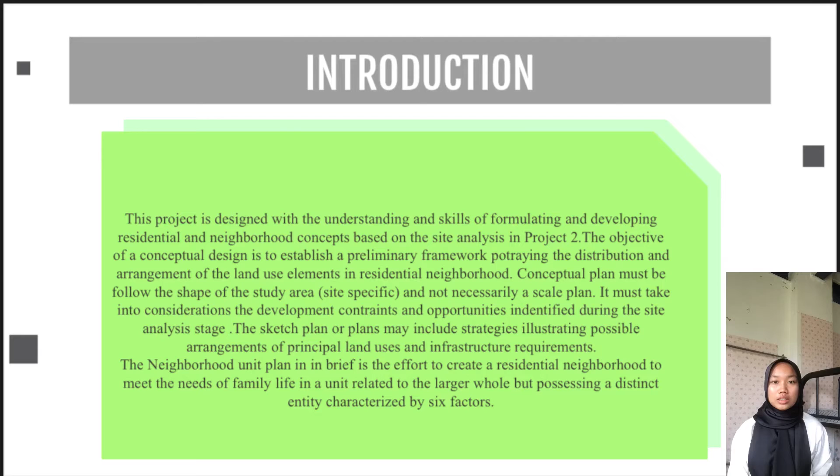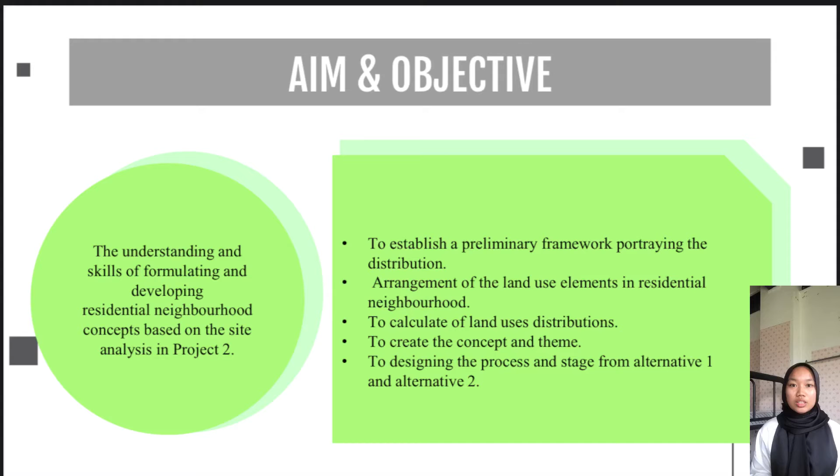The aim is understanding and skills of formulating and developing residential neighborhood concept based on the site analysis in Project 2. The objective is to establish a preliminary framework portraying the distribution and arrangement of the land use element in residential neighborhood, to calculate land use distribution, to create the concept and theme, and to design the process and stages from alternative 1 and calculation of land use distribution concept of neighborhood.

The neighborhood concept needs to be strengthened and emphasized in all types of landed and multi-story housing development to encourage interaction and social relation between residents.

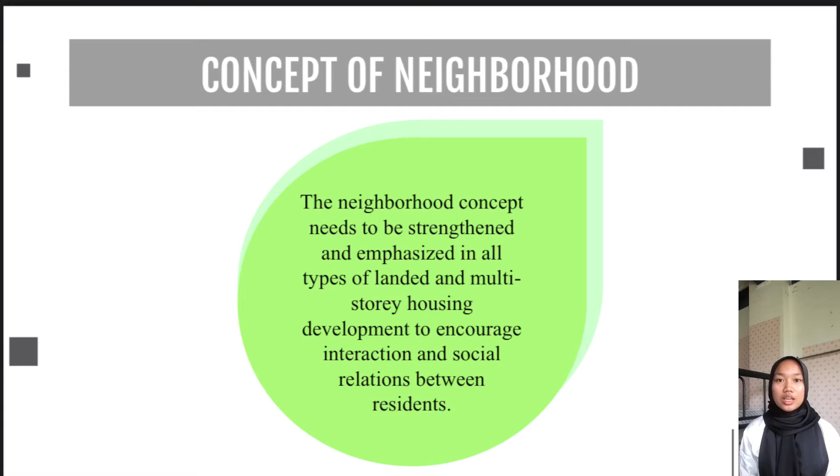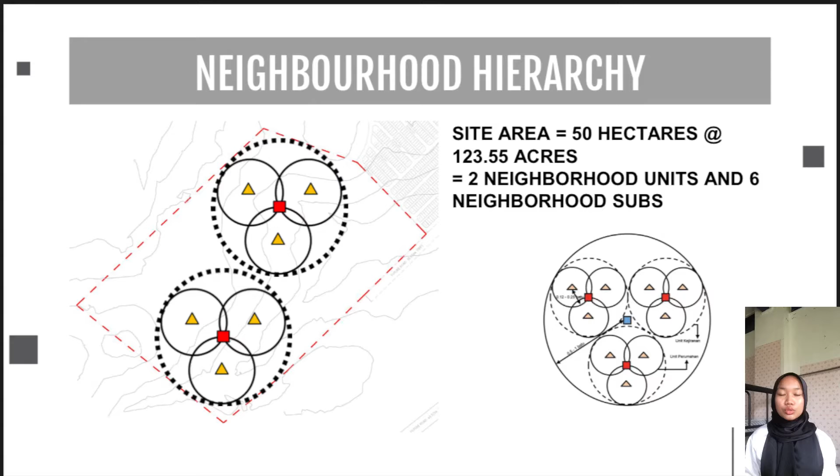Next, the neighborhood hierarchy. Site area is 50 hectares or 123.55 acres, equal to 2 neighborhood units and 6 neighborhood subs.

Percent of type of land use is 100%, and area requirement and percent of site for each land use according to the density set by standard area and hectare.

For the calculation of the total type of house is 30 acres, density units per acre is 936 units, and the last population is 4,815. This information is from Rancangan Tempatan Daerah Perak Tengah Jilid 2 tahun 2030.

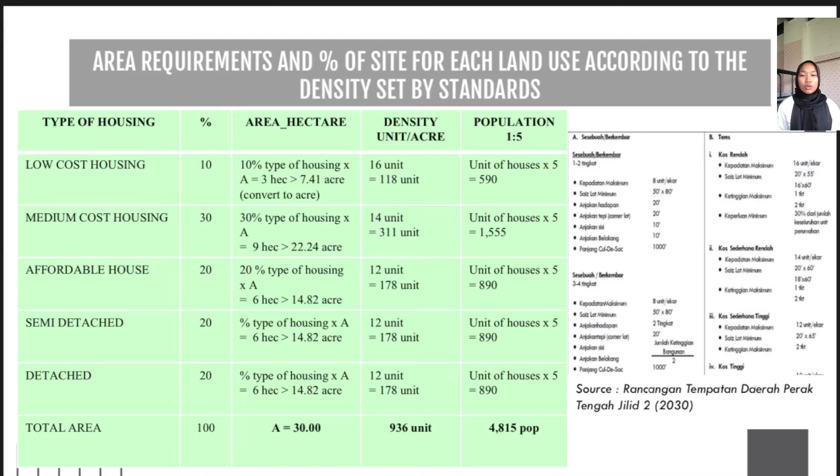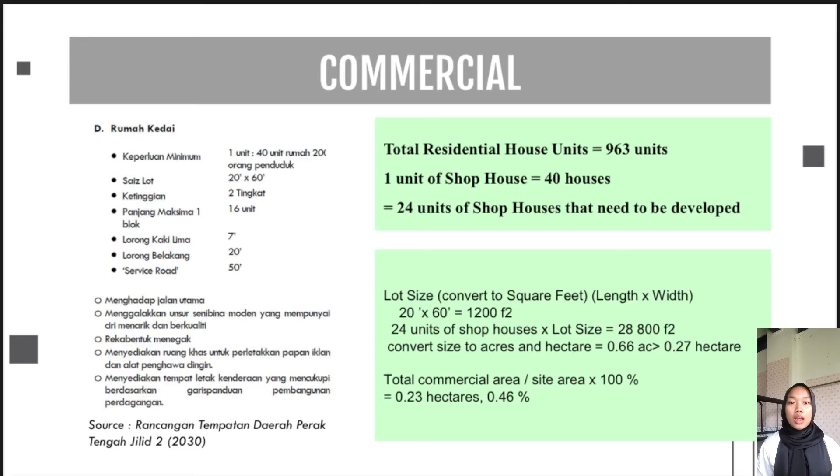Next, commercial. Total residential house unit is 963 units. 1 unit of shop house per 40 houses equals 24 units of shop houses that need to be developed. This information is from Perak Tengah District Local Plan Volume 2, 2030.

Public facilities: the community facilities are surau, public hall and kindergarten. Total area of facilities or site area is 0.74 hectare. This information is from Rancangan Tempatan Daerah Perak Tengah Jilid 2 tahun 2030, and Garis Panduan Perancangan Kemudahan Masyarakat JPBD Semenanjung Malaysia. Next, infrastructure and utilities.

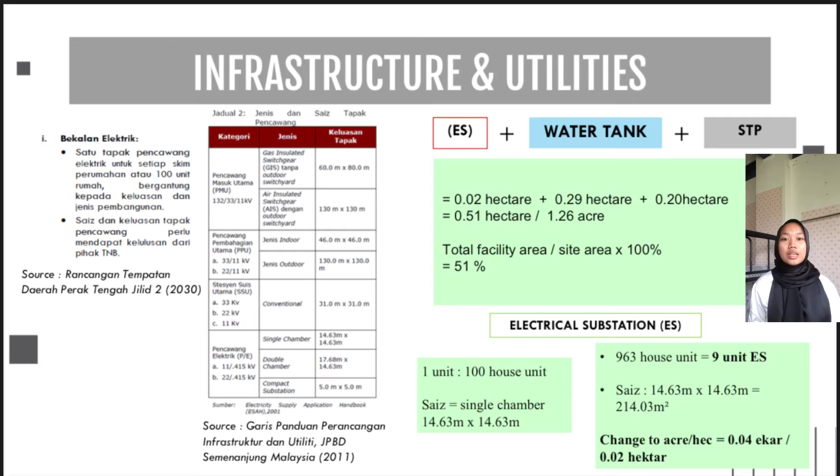Water tank: water tank has 0.49 acre and 0.20 hectare. This information is from Garis Panduan Perancangan Infrastruktur dan Utiliti JPBD Semenanjung Malaysia tahun 2011.

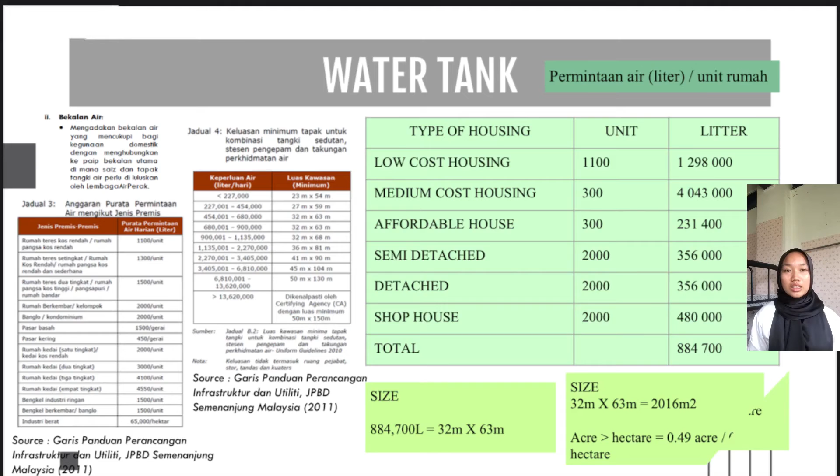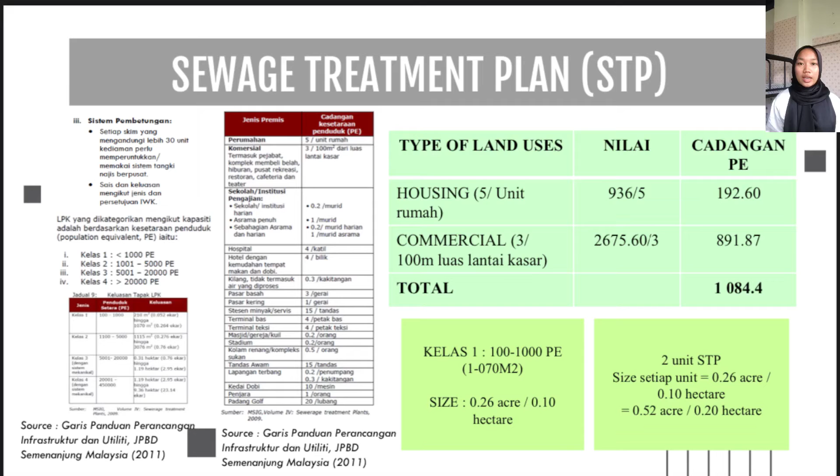Next, sewage treatment plant has 0.52 acre and 0.20 hectare. This information is from Garis Panduan Perancangan Infrastruktur dan Utiliti JPBD Semenanjung Malaysia.

And lastly, for open space, field and playground, area of 5 hectares and 10%. This information is from Local Plan of Central Perak District Volume 2.

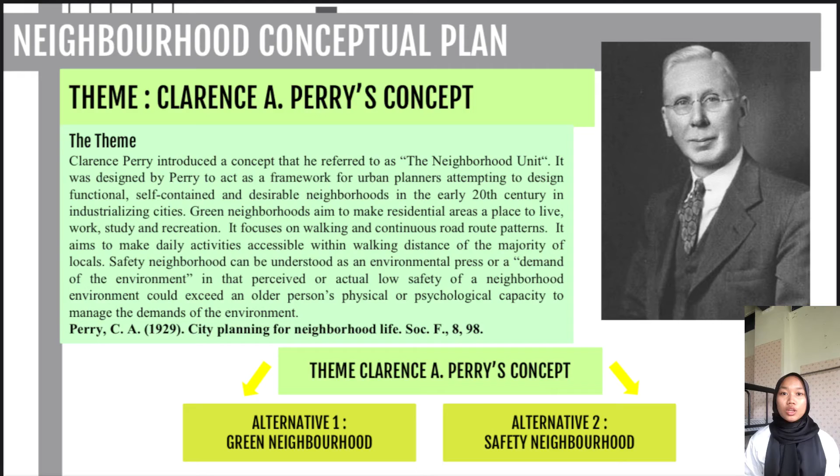Neighborhood Conceptual Plan: the Clarence Perry concept. The theme Green Neighborhood aims to make residential areas a place to live, work, study and for recreation. It focuses on walking and continuous road patterns, aiming to support daily activity.

Green Neighborhood: introduction of Green Neighborhood by Clarence A. Perry was conceived as a comprehensive physical planning tool to be utilized for designing self-contained residential neighborhoods which promote a community-centric lifestyle, away from housing that requires people to drive, so they can just walk to the place they want to go.

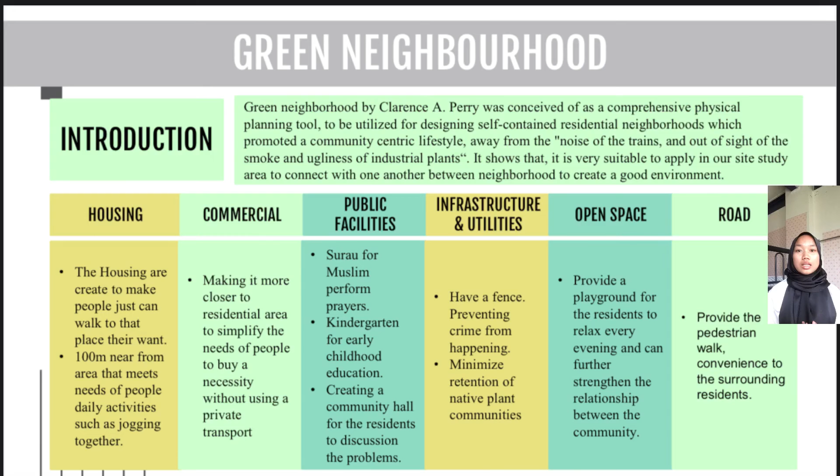Safety Neighborhood: introduction of safety neighborhood means a neighborhood free from social and mental threats, and also protection within the environment. Housing with a usable porch or covered area is encouraged, to allow homeowners to use their front outdoor space, increasing interaction with others in the neighborhood while maintaining eyes on the street, and supporting commercial activity.

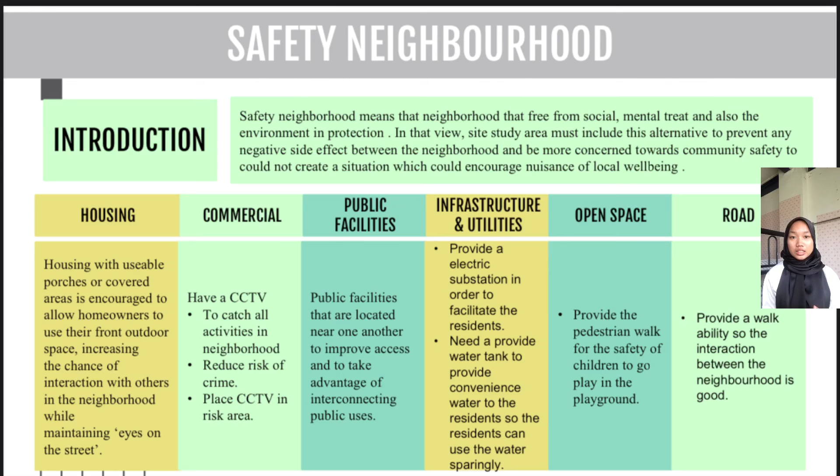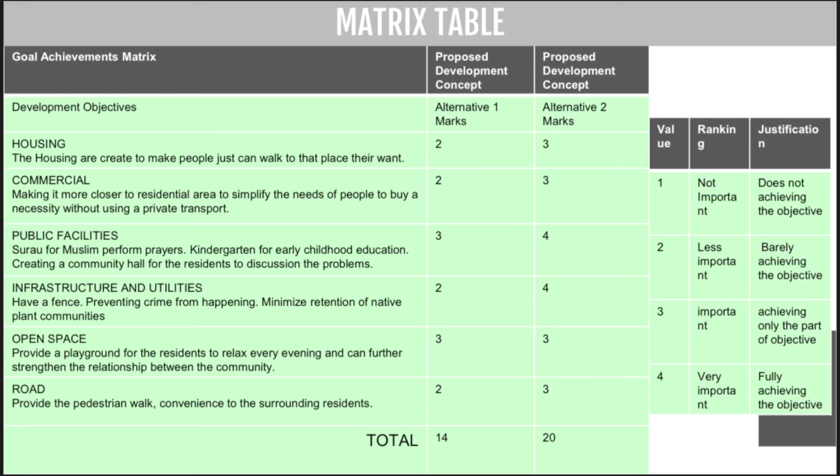In conclusion, the neighborhood unit plan in brief is the effort to create a residential neighborhood to meet the needs of family life in a unit related to the larger whole, but possessing a distinct, characterized entity.

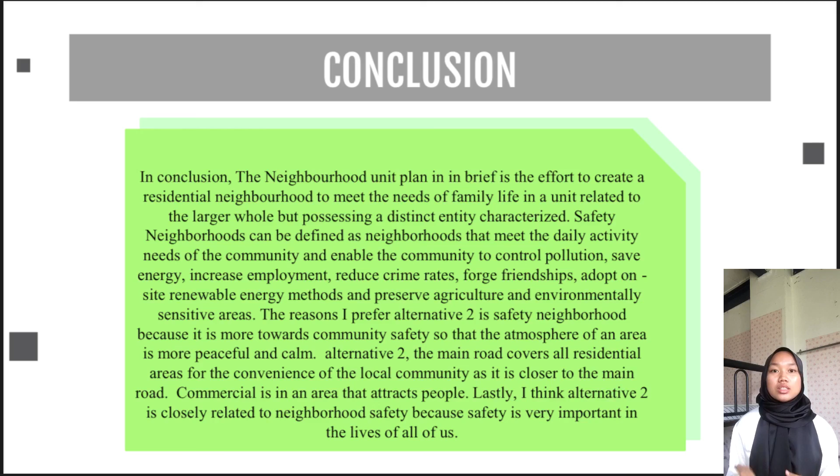Safety neighborhood can be defined as a neighborhood that meets the daily activity needs of the community and enables the community. The reason I chose Alternative 2 is Safety Neighborhood.